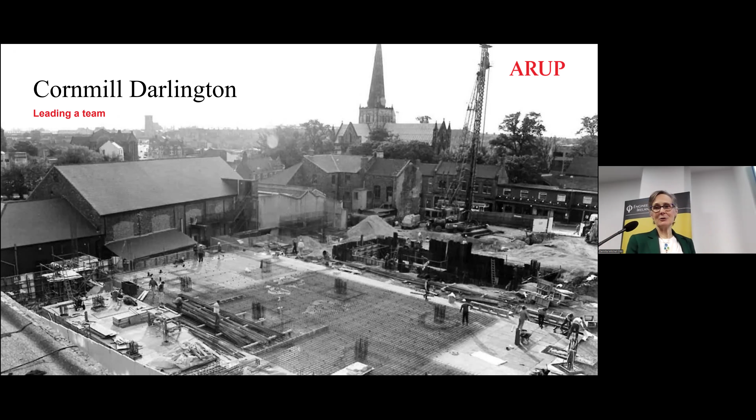So I now am moving into being a multidiscipline engineer, leading, managing a wider team. I think the importance of this stage in one's career is building relationships and helping those relationships last, so that you keep on doing the repeat work with these organizations.

At this stage I also worked with a guy called John Thornton, in a group run by John Thornton and John Berry - Graham is nodding there, he was there. John said to us, always write up your work, try and find opportunities to write in journals, to speak about your work. So he made us do a paper on concrete and steel hybrid construction for some magazine.

And I thought, this is going to be my ongoing career. I'm going to be doing building projects with architects over all this time. But no.

Along came Portcullis House in Westminster, and I joined the team quite late. I would still say today this is the most challenging project I have ever worked on. It was challenging because all the elements of the design were prefabricated. They were very refined in their sizing, and highly integrated as well. And then it all had to be delivered on a constrained site in the public eye. Not everything went well.

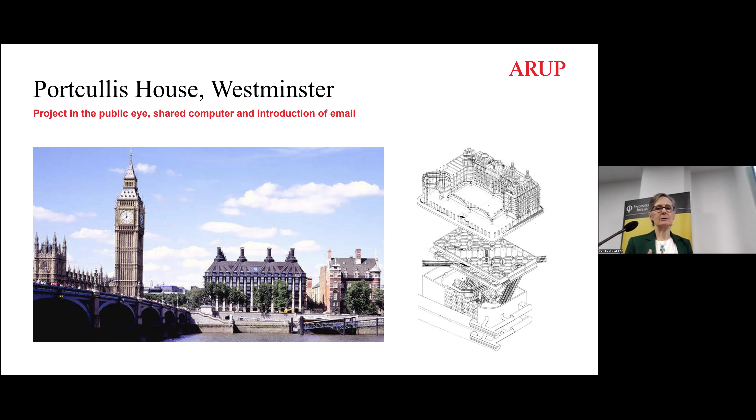So there was no need to have a computer at each desk. It was also the same time people started using electronic systems for transferring information. So instead of there being a letter and rolls of drawings and packages of drawings, it was sent electronically. The pace at which we worked, I think, suddenly had to increase. I'd say this is, I'm guessing, sort of 15 years in, but nothing much had changed in my career and the way I worked between the drawing board and this stage. It was all still quite the same. And it's only from here on in that I think the pace of change has increased a lot.

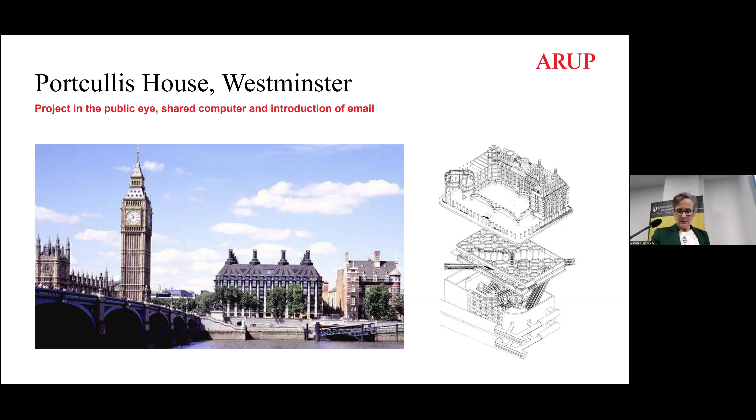So these are the prefabricated asymmetrical arches from the atrium of Portcullis House, because there are only 6 columns going down through the stations below. And John Thornton, who I mentioned a minute ago, said to me, Dervilla, I want you to design this connection. The things were probably already precast at that stage or about to be. I need you to design the connection inside here. So lots of couplers, lots of reinforcing bars. It hardly all worked. And for me, that was going backwards into some very detailed design.

And it was hard. It was really hard. But I would reflect on that now and say it's really important to go back and really strengthen your technical skills even as you go forward in your career. So I benefited from that, even though I rebelled for a while.

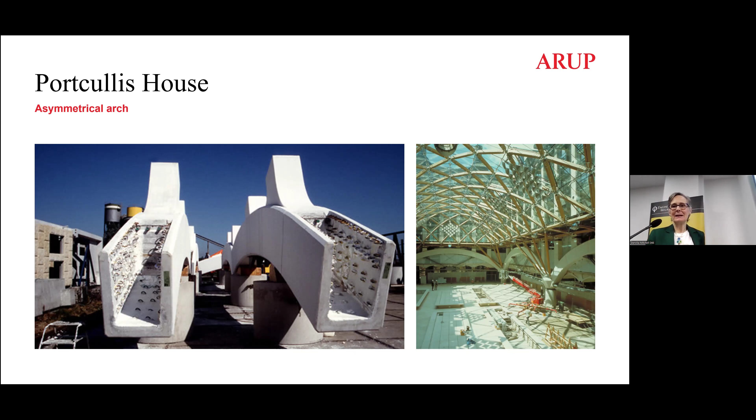And after a few years, John said to me one day, how about you go to Heathrow to do the Terminal 5 project? And I said, no. And he asked again, and I said, no. I was not far-sighted enough to see how wonderful that project would be for me, for my development, and how much I would look back upon it now as my favorite project.

And why do I think it was great? It was because we worked in a collaborative way with other people under a collaborative contract. And when there was a problem, we had a far-sighted client who enabled us to solve those problems. He didn't beat us up. He said, go in the room and solve those problems. But it wasn't only the behavioral contract.

There's a little image there from the 3D model. We called it the SME, the single model environment. This was the first time we'd really worked digitally. I ask us tonight, why has it taken us so long? This is 2000. Why has it taken us so long to adopt digital methods and to work in single models? But it did.

So here was a far-sighted client. They insisted we work like this, and we worked like that. And then they were a brave client. The image on the right is what they call the first run study. We recognized that the most complex part of this 200-meter wide roof was going to be the supports, the abutments. And so Norman Haste, who was the project director, agreed we would, up in North Yorkshire, build this — we'd spend £4 million building this first run study. Everything was going to be reused from it, so it wasn't a waste of money, but we were going to build it 9 months ahead of getting on site. So I think that's a big, brave decision.

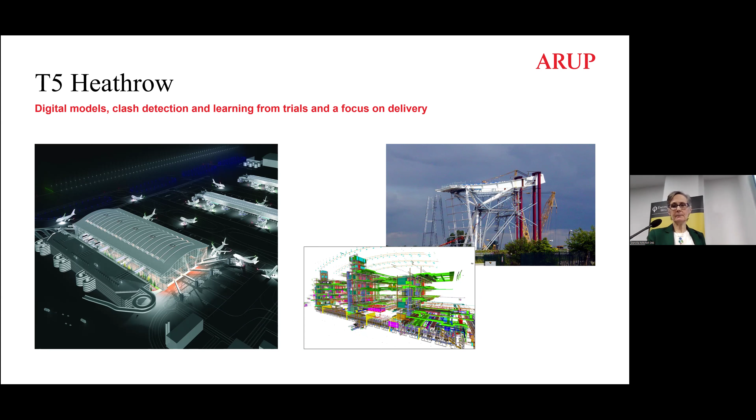And I got a huge amount of joy, I again spent 6 years on this project. 6 years is a common thing I spent, but I was able to be involved with this project from the inception, understanding on the top left of how the roof behaved. Thank you, Steve McKechnie, for going to Finland to see them assemble all the elements of the roof.

There were 6 or 9 meter sections. The Finns, that section of the roof is about 100 metre span. And when they checked them in Finland, they were plus or minus 3 millimetres. Pride in their work. Anyway, it then came to site.

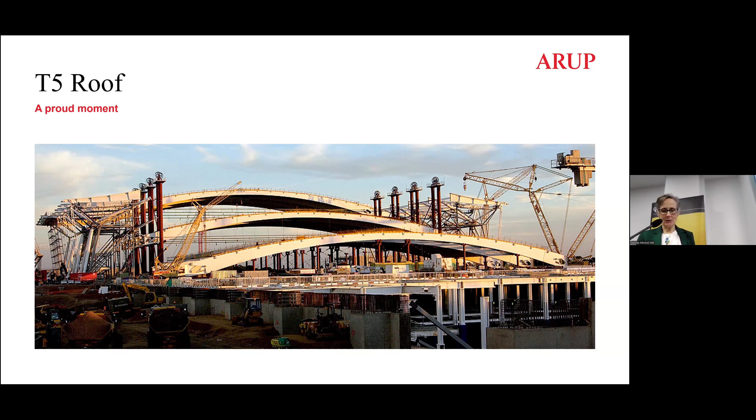And then you have to decide what are you going to do. And you have decisions of the heart and decisions of the head. Mine was a decision of the heart, to go to Dublin and work on a project in my hometown.

And here I thought, I'm coming to do something similar again, it's another 10 million passenger per annum terminal. I've done this before, but what I learned was that every project is different, even if it looks a bit the same. And this one, the whole design was driven by the constraints of the site and access to Terminal 1 whilst Terminal 2 was being built.

But a fun part of this project was I got to do stakeholder management, and I'd never done that before. And so I got to deal with the angry airlines, the angry residents, but there were lots of lovely people too. And you learn how do you communicate engineering, how do you talk about your design in a way that a range of people can understand. So that was an interesting challenge.

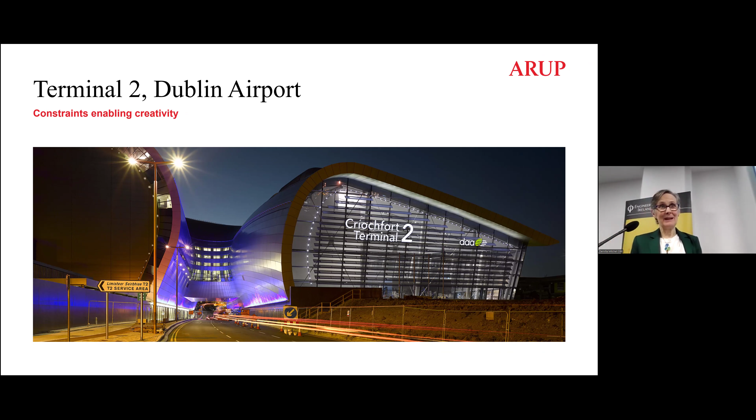And tips for the family: I had to spend at least one night, maybe 2 nights a week in Dublin every week during the design period. Leave your family, 3 kids at this stage, leave your husband and family on the same night every week, because then the kids knew Mum is not home on Wednesday night. Thursday morning, I've got to be up and get myself out, Mum's not going to be here to help. And that routine really helped the family deal with me being away.

Back in London, I got onto the Athletes Village 2012. But at this stage, not the infrastructure.

I was helping develop the concept for all the housing. We called it the Athletes Village, but actually this is creating legacy, creating Stratford City. We designed for the final in-use.

It was converted back for the games, converted again for the Paralympics, and then converted back again to housing. That was an interesting stage, but I didn't find it as rewarding as the airports, because I was never going to see the buildings in use, and it was so commercially driven. I like things that have people at the heart of it.

Another change in the industry: Arup's main board had been all male until 2009, when the wonderful Jenny Baster, who was our legal counsel, joined the main board. So we're seeing a change, and I think that was an important time. Us ladies all looked up and said, oh, that's interesting, women can do that.

A number of years passed, and I was asked by another colleague if I would spend time on Abu Dhabi Midfield Terminal. This terminal we call a squashed frog from its configuration. It was designed and conceived in 2006, 2007, before the global financial crisis. Then it was delayed, then it was procured on price.

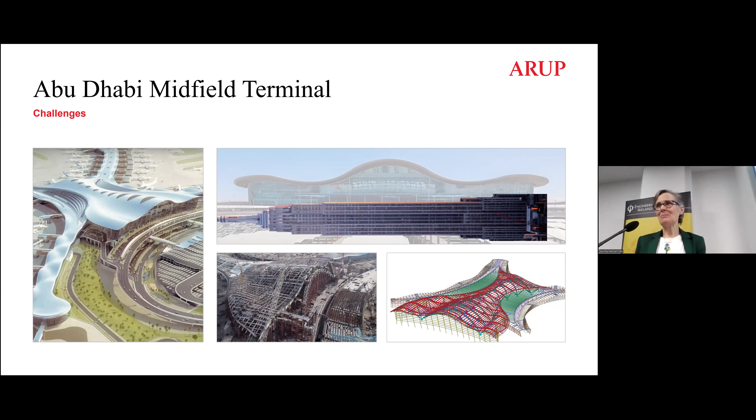I couldn't escape aviation, so I was back in London again. The routine in Abu Dhabi was: go out on Thursday, go out on Saturday afternoon, so you're there for Sunday to start, and spend the whole week there, leave on Thursday night and get home to the family on Friday. I did one week in Abu Dhabi, one week in London, repeating for quite a long period.

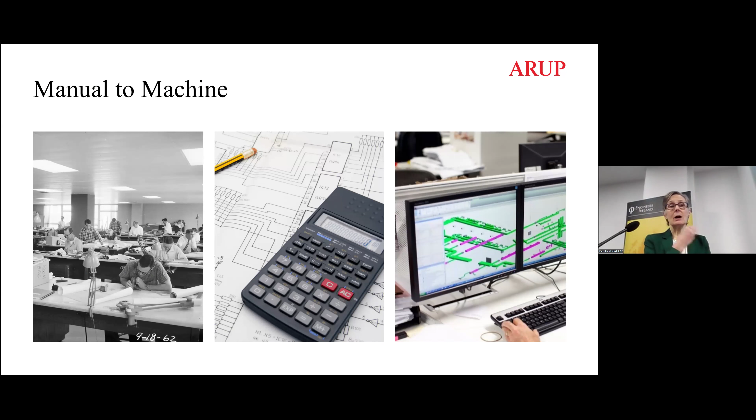I wanted to reflect on the changes that happened over my career - what's the evolution I've seen during that time? We've seen manual to machine, and I think we can solve much more difficult problems today because of that change.

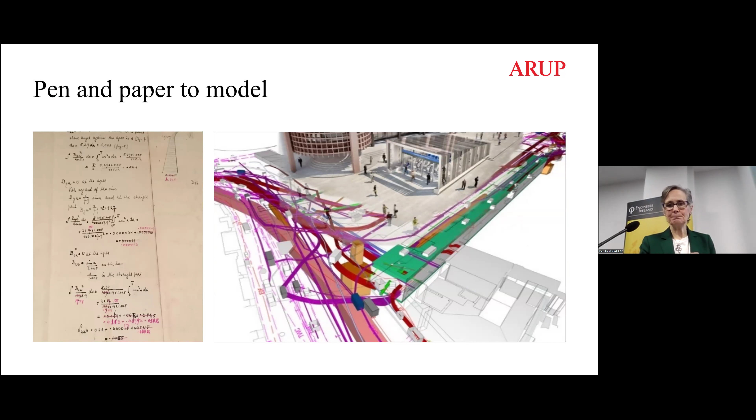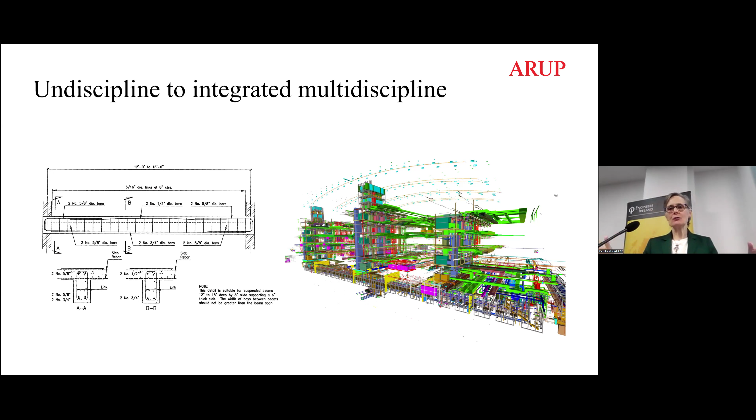We've moved from uni-discipline to multidiscipline, so for the younger people in the audience, this makes your career much more interesting and exciting, and you can learn beyond your original discipline. One change that appeals a lot to me is we've moved from outputs to outcomes.

When I was designing the first of these hotels, Embassy Suites - the first one's in Baltimore, and then I did the second one in Michigan - nobody ever mentioned how the kitchen was going to work, how the staff were going to use it, what access was like. It was just: this is design, get it up quickly and cheaply.

More recently, I've worked on advising a school in West London on their £20 million development - this is the sixth one they've produced. Every decision we made from the outset of the design right through to completion was about what is needed for the students' education.

They're all girls, by the way. What was needed for the education? What do the facilities have to be for the teachers? And how would we enable that through the delivery of the design? We had an amazing architect who worked that all through, and a fabulous scheme resulted.

So that's all delivered now. I think those are the sort of four key things that I've seen as change.

But also, one has a lot of personal transitions, and transitions are hard. Change is hard to deal with. I've made transitions from structural engineer to multidiscipline, design to management and leadership, different roles, different locations. What I would say is really think about these not as hard transitions and difficulties. Think about them as the opportunity you have to grow and learn and advance your career. Then somehow it seems easier to manage those sorts of changes.

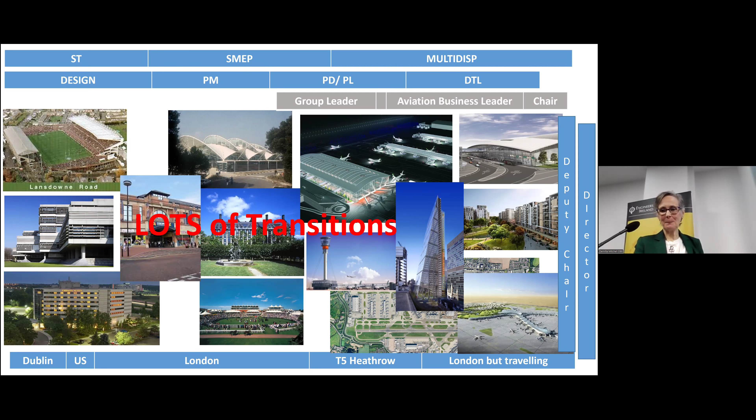And the final thing I have seen in the industry is, it was all about the art of men directing the great sources of power in nature for the use and convenience of man. Everybody who was put in front of me as a role model was a man. Nobody told me about this lovely lady, Emily Roebling.

She is the one who oversaw the delivery of the Brooklyn Bridge in New York after her husband got the bends. Now, wouldn't you want to be an engineer like her? Well, she was probably a project manager, but nobody told us about these things.

Today, I'm proud to say in Arup that I've had a role in helping with diversity there. We today are a 60-40 organization, and that sometimes means in some teams 60% women and 40% men. But the 60-40 is what our ambition is, and we've almost 30% of our leadership is women.

They really wanted to see change because they wanted change within their business, but they also wanted changes for their daughters and their granddaughters, and they thought it would be good for us. So I've had a very lucky time there.

And I was saying to Con earlier that the pace of change is glacial. 1% per year is good. So aim for that in your businesses.

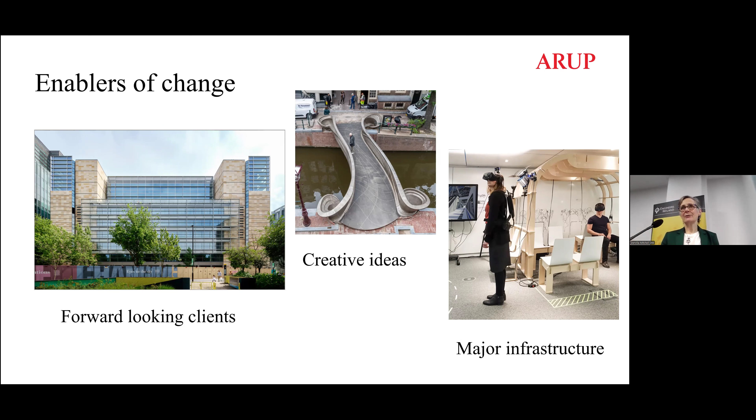So thank you. But I asked some questions at the beginning. My questions were: can we evolve fast enough as a profession? Yes, we can - we've shown ourselves we can do it. What enables change? I've talked about three enablers for change. But can we be at the forefront and recognized by society? I think, yes, we can. But we do need to step up and be seen to be solving those problems in consultation with the public. So thank you for listening.